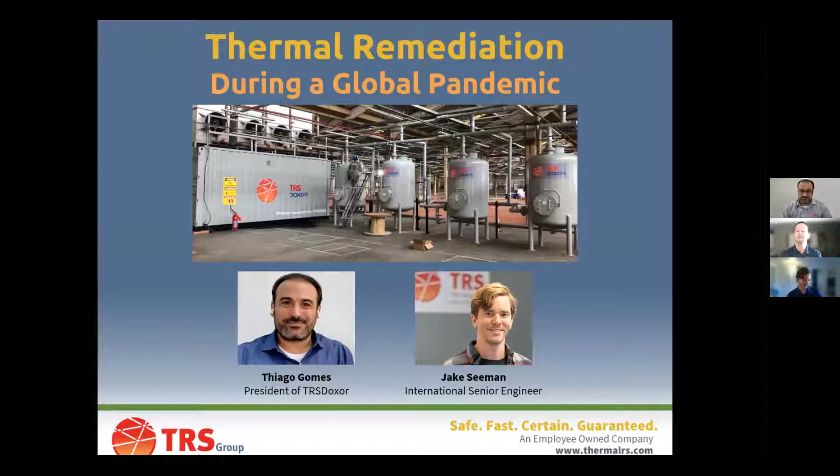This is a very special webinar because we're going to be talking about something that's not highly technical, you know, how do you cook TCE out of clay or anything like that. We're going to talk about the challenges that we've had during the COVID pandemic. As a group, TRS has over the last couple of years operated close to 20 thermal sites, and many of them in Brazil. So today we'll be talking about the ones in Brazil, and you'll be meeting Thiago and Jake.

One of the things that is a challenge is when you're doing a thermal project, you're heating up the ground, you're making the chemicals volatile, and when you do so, you have to extract them and you have to treat them. So you can imagine that we had projects in different stages of implementation. We had projects where we were drilling holes to put in electrodes or heaters. We had projects that we were constructing where we had as many as 10 or 15 people pulling these cables and laying them out between the power control units and the individual heaters or electrodes.

We had other sites where we were building or assembling the equipment. And then there were sites in operation. And all of a sudden you have this COVID challenge saying you cannot travel or you cannot be more than a couple of people at the site at any one time. So how do you deal with that when you have clients that still have tight schedules that want to be finished at a certain time? The other thing that happens is the price of everything increased. The copper cables got more expensive, iron pipe got more expensive, but clients don't want a price change. So that's the topic of today.

We will start by hearing from Thiago. My first question for you, Thiago, is if you don't mind giving us a little introduction about yourself and why you're interested in thermal remediation.

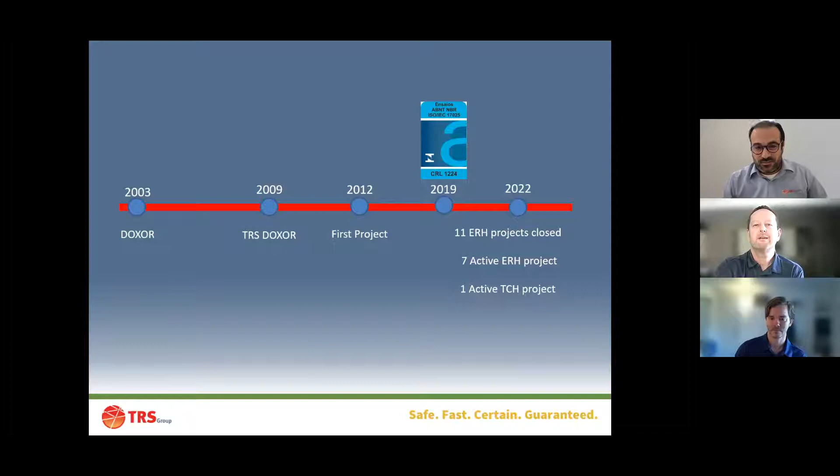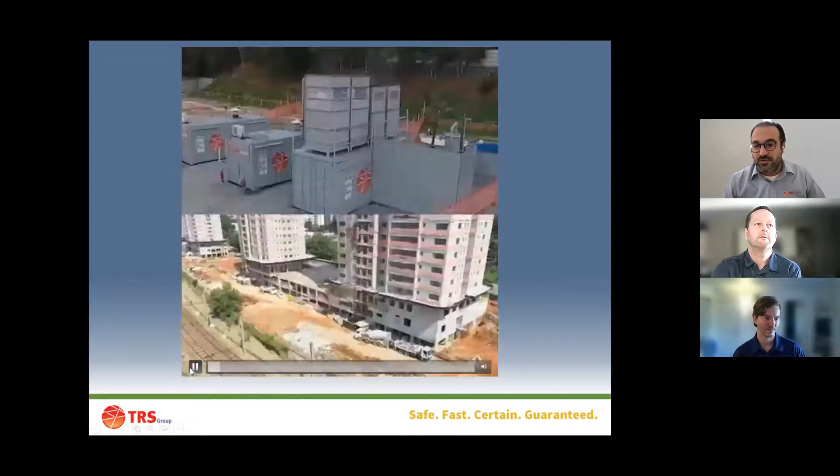Can you show us just one site and explain the driver behind cleanup? Sure, I can. One of the main drivers in Brazil was really the real estate, so redevelopment. There's a huge pressure for these areas in São Paulo.

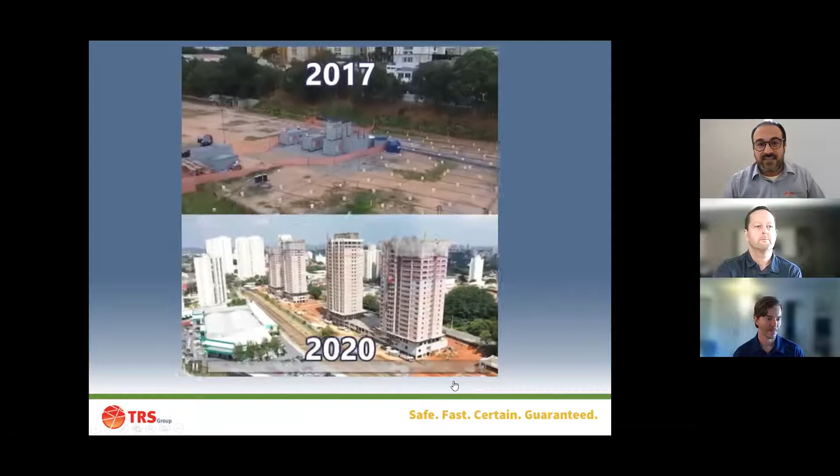You can see this was a really big site. We installed 468 electrodes, if I'm not wrong. We had to divide the site in sections because we needed so much energy to treat that site - we wouldn't have all this energy available in that neighborhood. So that's probably been the main driver. It was the main driver.

Nowadays I can see a little bit of change in the mentality, especially in the industry. They've learned in the past that you better spend more money up front and really solve the problem, treating your contamination sources using thermal instead of trying other technology - especially in Brazil, where we have such tight clay in most of the place, so it's really hard to use other technologies. That's one of the reasons why thermal has been really successful in Brazil, and there's been more and more sites going on.

So you definitely need to clean the sites because, a couple of years after you're done, houses will be built and there will be vapor intrusion if you don't do it right.

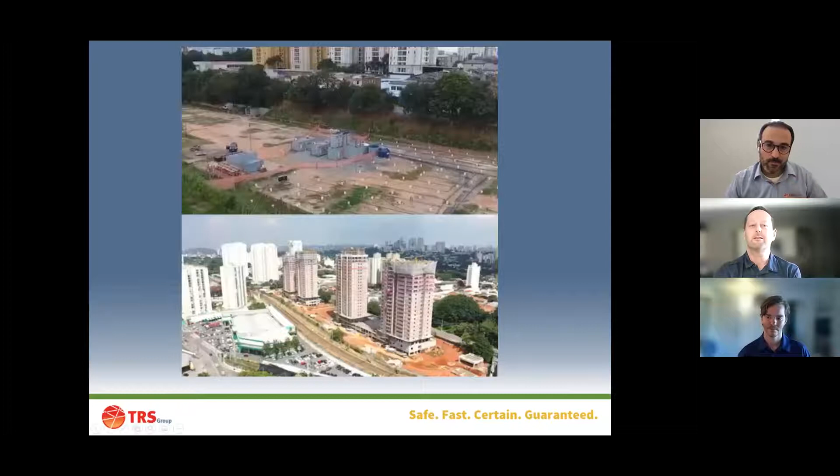Exactly. Jake, I know your role involves helping with the tech transfer, right? Training the Brazilians how to do this. Would you mind showing us a few more details of what that entails, please?

Yeah, absolutely. So with thermal technology, it's important to get to temperature within 2 or 3 months. We want to heat the site up fast because that's the most efficient, so the infrastructure is really important. The first thing that we had to teach Docstore was to build really good electrodes, and that was our primary focus at the start of the tech transfer.

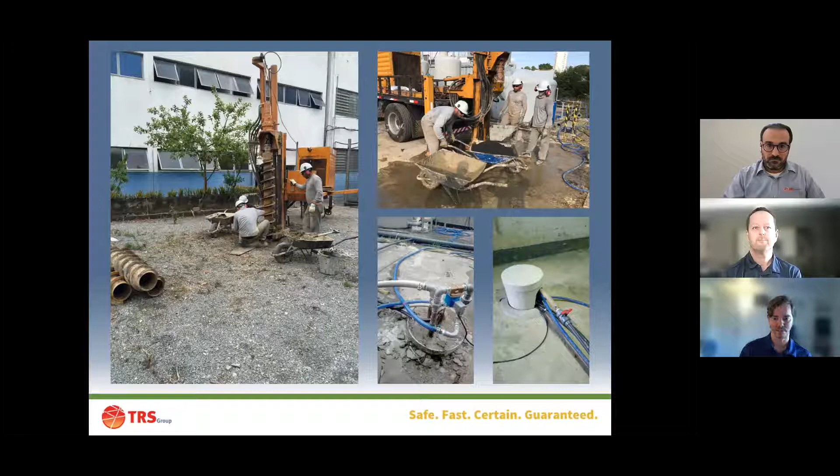Here's just some photos. When you think about it, we're working in Brazil, it's different than the US - there's different machines, there's different ways to do things. So we just have to make sure that we're still doing things at a high level, even though it's a little different.

The next thing we did with Doxor, which was really impressive, is that we had to build a power control unit - we call that our PCU. TRS basically sent over our specifications of the unit that we think would work best in Brazil, and Doxor built it from the specs. That's important because the PCU is distributing the power to all the electrodes.

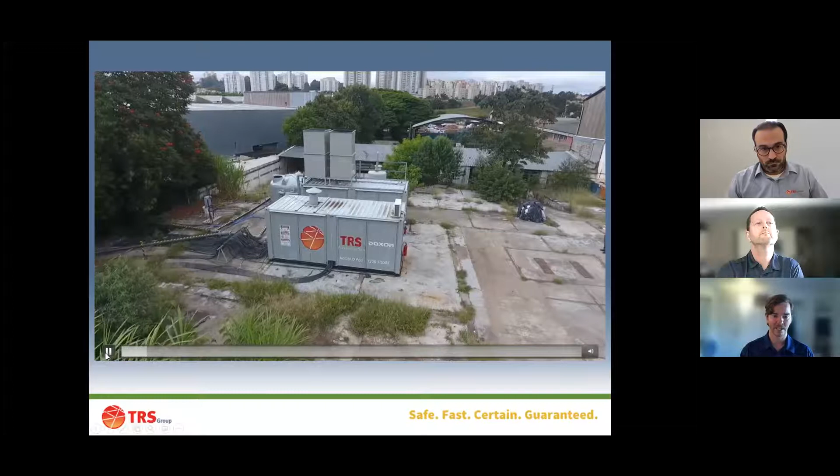The second container here, the one with the little towers on back - that's our condenser cooling tower skid, and that's going to assist with the vapor liquid treatment side of the system. Same principles apply: we sent the specifications to Doxor, and they built it.

This project here is really cool. Davi took his drone out, and we did this right in the middle - most of our projects are right in the middle of São Paulo. It's a really big city. It impressed me a lot the first time I went; I was just amazed by the size of it.

And then the last thing that needs to be transferred is health and safety. One reason we partnered with Doxor is because they knew the importance of health and safety. But in ERH and thermal sites, health and safety has different details you have to be aware of.

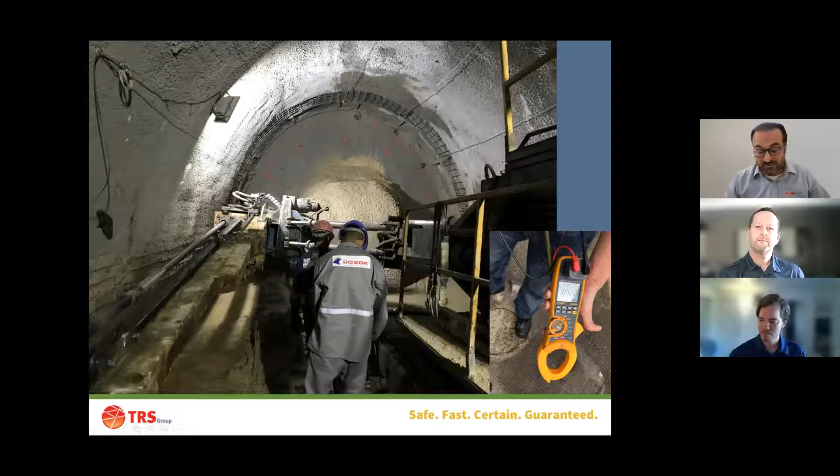How did you manage, because you had multiple sites in different phases? It was quite hard, as you mentioned, with many different sites in different phases. The good part was that the environmental agency in Brazil considered remediation on sites with a possible vapor intrusion problem or any risk to human health as essential service.

So we were able to work while other companies in other areas couldn't. On a site like that, we had trenches open, we couldn't just leave the site and let those trenches open, so we were able to finish. There were sites where we worked on industrial facilities with other companies on the same site, so we had to synchronize because we couldn't all be there at the same time.

We had to rent cars for every single employee because they couldn't share the same cars to go to the site. It was quite tricky, and on some sites we couldn't have more than 2 people from our side, so we had to extend the work a bit. It was pretty tricky, but we were able to finish all the sites on time.

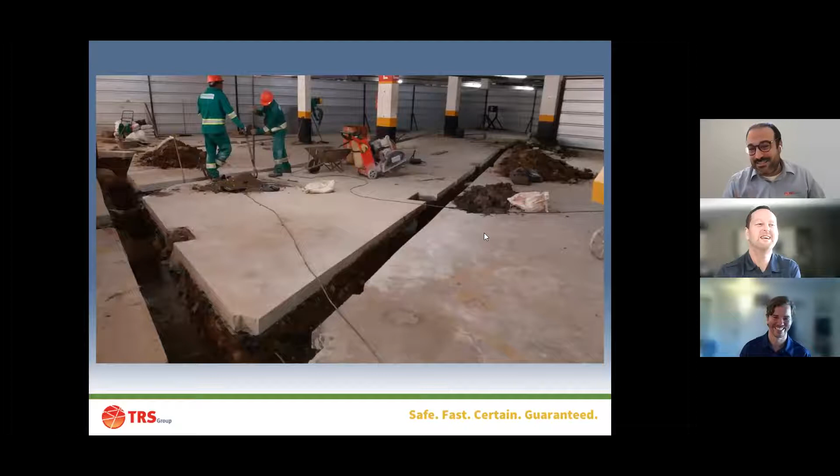This one you definitely couldn't just leave like this, right? No, we couldn't. That was a parking lot under a building. We couldn't leave it the way it was.

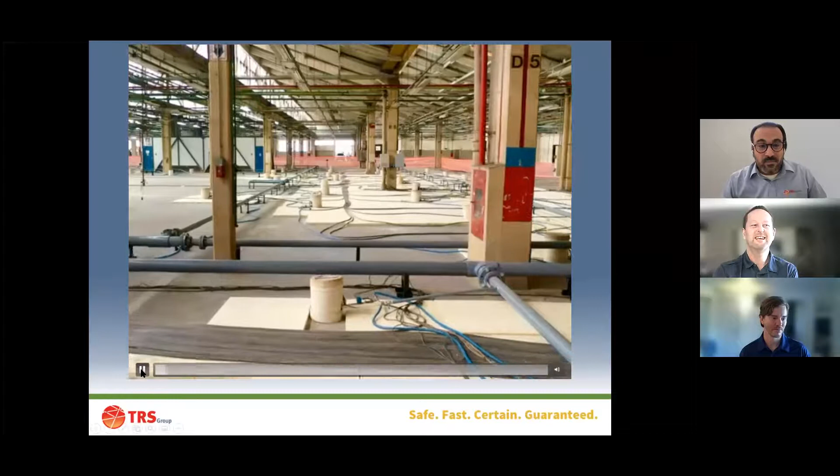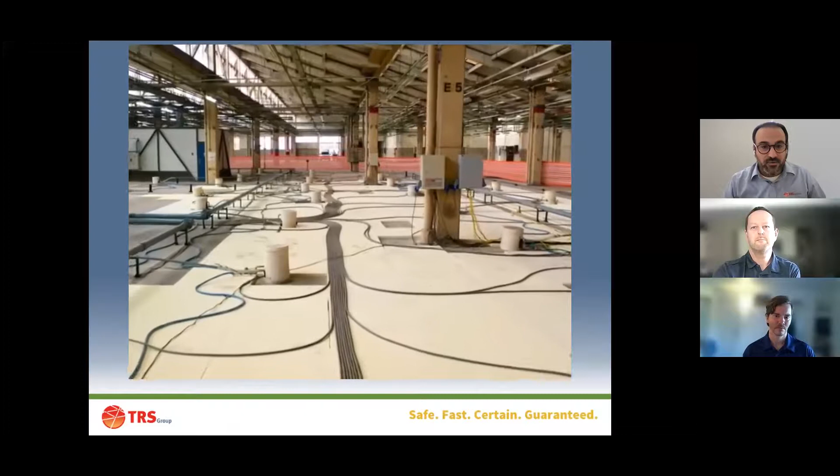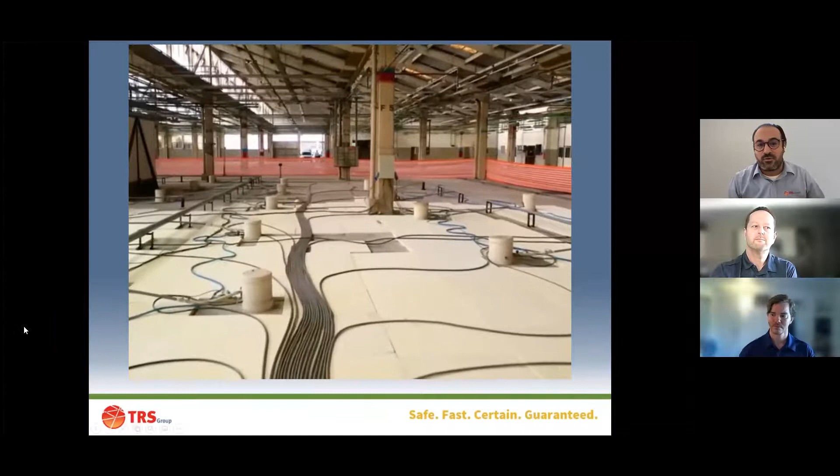Whereas this one is in better shape. Yeah, this is the one I mentioned, an industrial site with a multinational German company as our final client—we always work for consultancy companies, but the final client here is a German multinational. There were other companies working on that site, so we had to schedule with them since we couldn't be there at the same time. But we were really close to running the site, so we were able to finish and run it during the first months of COVID.

When you turn it on, how many people do you need at a site like this? Usually at least 4 people helping on the commissioning, and normally somebody from TRS would come down and help too. We couldn't have that on some sites since travel wasn't allowed, so we had 3 people doing the commissioning on-site, plus 2 online helping us check all the data so we could increase power and make sure everything was safe.

Jake, it must have been tougher for you, right? Because you used to just jump on a plane, go down there, help with the startup, take data, write it down. How did you keep track of things as they happened when you couldn't travel?

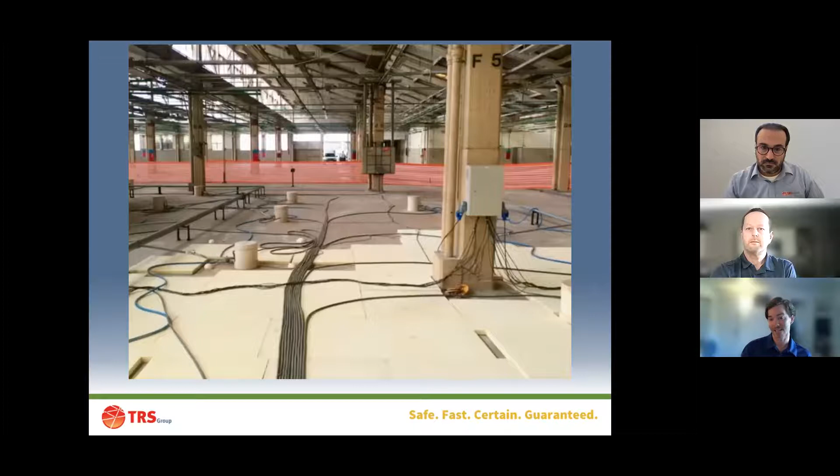Yeah, like Thiago mentioned, I generally go down for every startup, and in this situation I couldn't. Luckily, TRS and Doxor already had 8 projects under our belt completed or almost completed at the start of the pandemic, so we had a lot of systems in place for good communication. I knew the field staff very well, so these systems just became more vital. We have group chats for every single project, so I'm sitting on every project, viewing what's going on, asking questions, and seeing the photos.

And here is a screenshot of our condenser page from the control system. We have a remote control system that I log into pretty much every day. First thing to check is make sure the vapor liquid treatment system is running. Look at temperatures, look at data, just make sure everything looks okay.

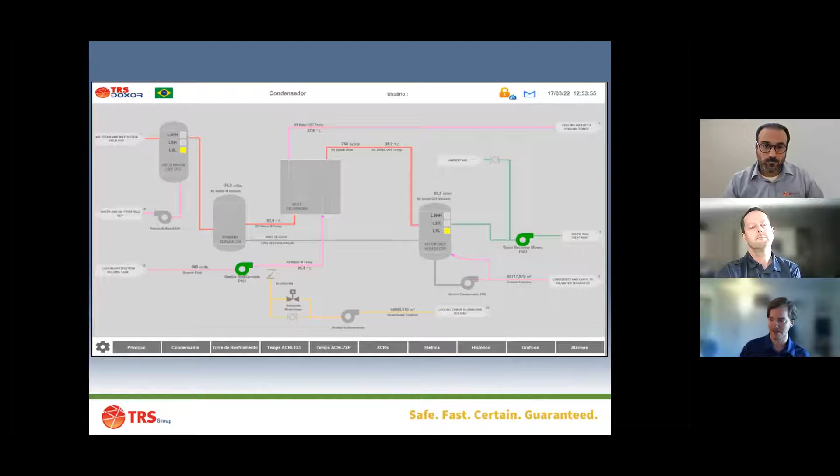After that, I scroll over to the power page, and we make sure that we're getting energy into the ground, and that it's going where we want it to go. That's really important. We don't want to waste energy by putting it in an area that may already be clean or just doesn't need that much energy. We also use temperature data to review energy input versus temperature and how that's going.

So all these systems were in place and I had been doing them. The big thing was more calls to Thiago, more calls to the guys on site, making sure standard operating procedure documents were available and translated into Portuguese for the guys. And then we just kept going along the way we had been going, but just a little bit more remotely.

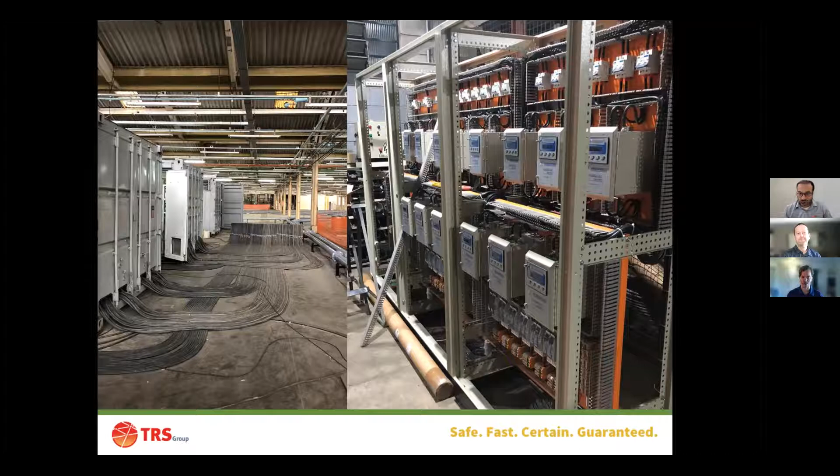Oh, 100%. No, I'm just kidding. We get to learn back and forth, and it's pretty great. Doxor, as Thiago just mentioned, was a huge part of our R&D efforts for TRS in the thermal conductive heating area.

This is a video of our first project for TRS Doxor for TCH, thermal conductive heating. They were part of the R&D, and we actually started building that PCU shown on the previous slide, and started our first project during the pandemic. So talking about translating documents, getting information over to them remotely, all of that during the pandemic - it was challenging, but it was a good challenge, and the result was great. Doxor did amazing work on the construction and installation. It was really beneficial being able to use some of their resources at their warehouse to install and operate our first pilot test, and then from there we got to see this site.

And it's actually a video. If you want to play it, it'll show, kind of span out the entire site. Yeah.

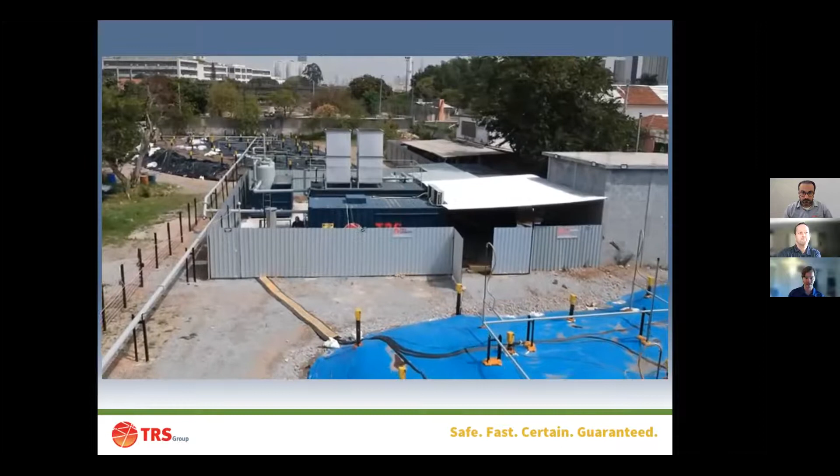Another part of that information transfer is, I'm part of the best practices team for TRS Group. And so when we're evaluating a new material that we can use, maybe a more effective option, maybe a more cost-effective option, safer or something like that, I'm always bringing my experience from TRS Doxor into the discussion with the other engineers. I'm saying, well, this is how we did it in Brazil. Can we do something similar? Is that possible? And vice versa.

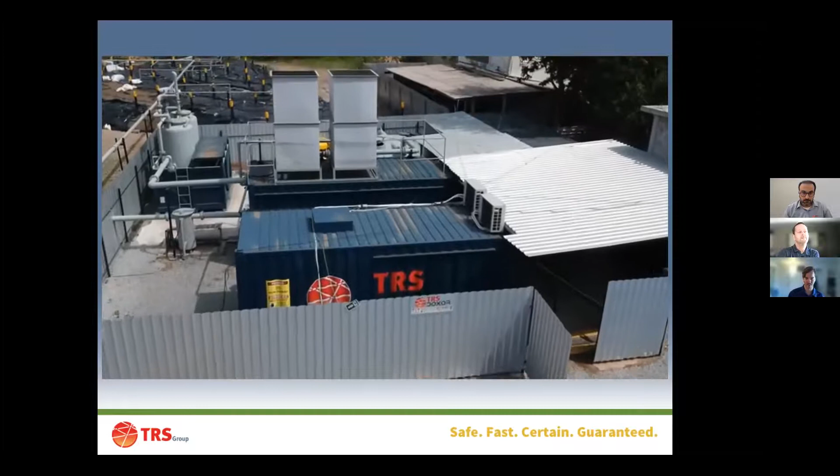When I see a new installation or a new project in Brazil that TRS Doxor needs to do, same thing, I go back to the best practices team and get that information from them. So it's very synchronized and it's very back and forth, which is a lot of fun.

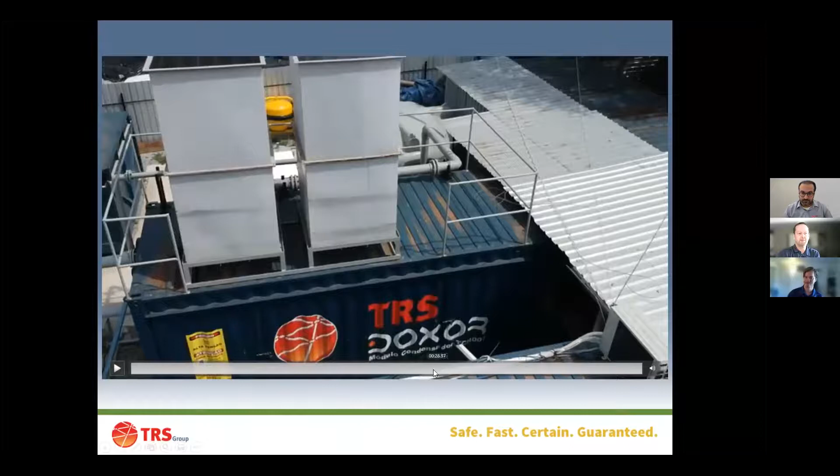Awesome. I have a silly question. How come one area is blue and the other one is black? Different stages of the construction. So like Thiago was saying, during the pandemic, materials were difficult to get. So we started this first area, we'll call it the blue area. We were able to start this area first because we got all the materials, they arrived and everything like that.

What you're seeing, the blue, that is a waterproof membrane, so that we don't get any rain or water infiltration on the TCH site, because with TCH, thermal conductive heating, we try to dry out the site in most cases. And in this case, we are trying to dry out the site. And so that waterproof membrane is very important.

You can see in the far area some brown as well as some black. Oh yeah, there we go. So the brown is mineral wool insulation, so that we get a nice warm coat around the site. I know you've used that analogy before, Gorm. And then the black is the initial liner that we were using to keep all that insulation nice and protected. And then we were going to install the blue waterproof membrane over the top of that. Cool.

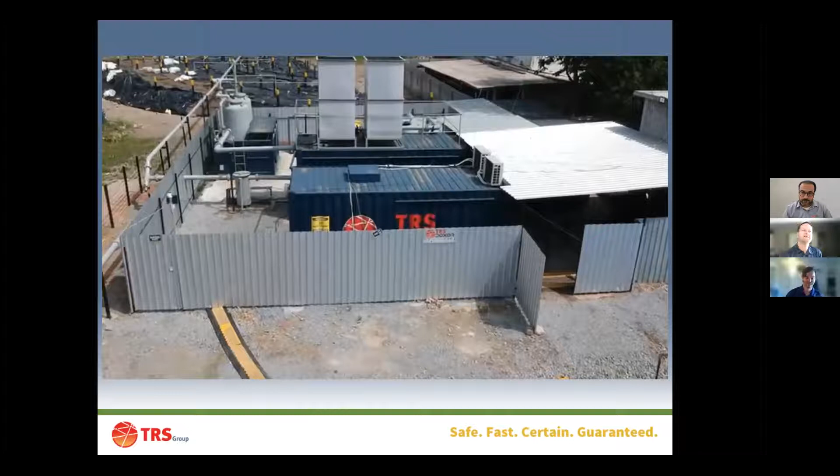So our heaters can get upwards of, Gorm, I think it's 900 Celsius. Mm-hmm. Yeah. So our heaters are running at 900 Celsius, give or take. And I think it's like 5 inches between our heater and a pipe that's in the ground, co-located with the heater. And that co-located pipe has a high temperature thermocouple, or RTD, a temperature measuring device. And so we're measuring that temperature.

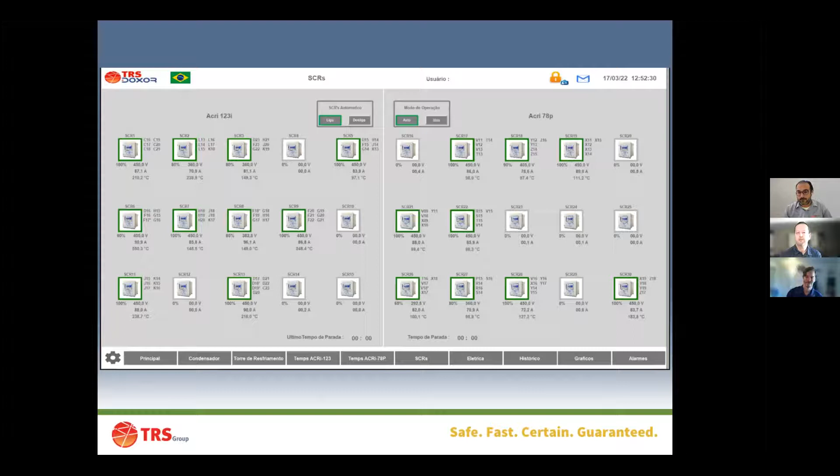There's a question from David asking, can you use this for PFAS treatment in soil? Yeah, we are using it for PFAS, and Gorm, I think you know a lot more about the site that we just completed. Yeah, we were doing some PFAS research. I think it'd be better if you spoke to that one. Okay, yeah, it's definitely the thermal conduction heating technology that you're seeing in this screenshot, a TCH thermal conduction heating site, right?

These are electrical heater elements inside a steel pipe, and you can put them closer together than this. And as long as you are above the water table, you can remove all the water by boiling it, and you can get to temperatures of more than 300 degrees Celsius. And for PFAS, we have found that we need to get above about 350 Celsius before we get really strong reductions. And we've done that in the laboratory.

We have done it in the field now in Alaska. We finished an ESTCP demonstration. That's a research funding program. We finished that right around Christmas time, and we have our soil samples back showing very, very good reduction in all the PFAS compounds we can measure in those soils.

So yes, we can do it above ground. What you're seeing here is actually a vapor cover, and there's a mound for insulation purposes. But sometimes we treat a pile of soil that looks just like this by sticking heaters into them and heating the soil until the PFAS has been extracted.

We can also do it in situ in the vadose zone, so above the water table. We can do the same. And the second project is going to be performed at Beale Air Force Base in California this summer. So that was definitely a yes to that. I see a few more questions coming in.

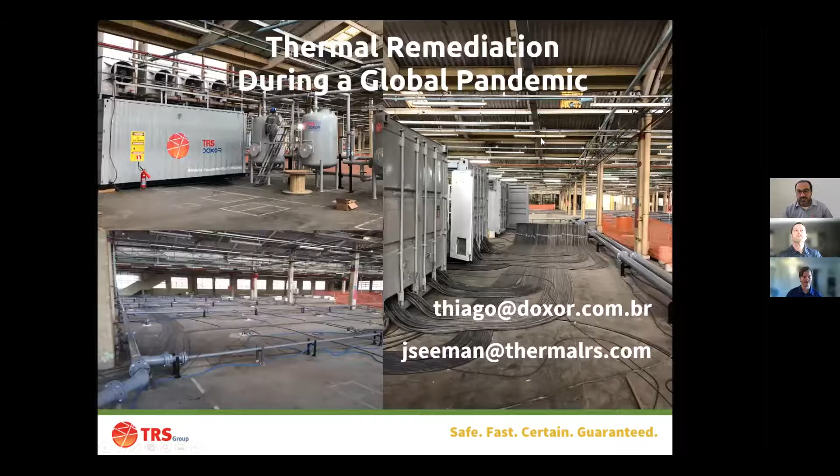Nick is asking, given the rising cost of commodities like copper, have you had theft, and has that been an issue at your Brazilian sites? And what do you do to make sure you don't get break-ins? What kind of security systems do you have? We never had a big problem in Brazil, even though we know there is real big value in all those cables laying over the site. There were sites where we had millions of reais in cables like this one. There's a lot of money in cables right there.

So at most of the sites we usually have a security guard 24/7, and we also have sensors so that if somebody gets in the site and tries to steal something, first thing is safety. It will shut down the system. There is no risk if somebody tries to grab a cable or something. So we turn off the system.

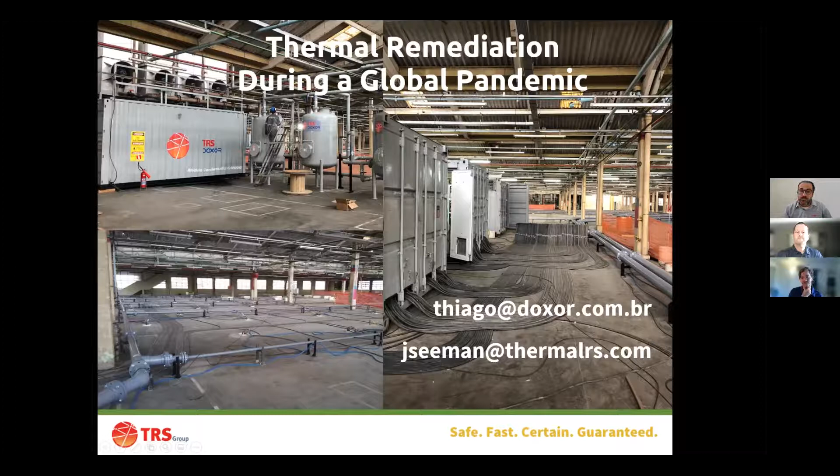And at the same time, we are recording, we have cameras, we have alarms on our phones. So there are ways that we can monitor the site, make sure that we don't have any big problems with thieves, and especially that somebody doesn't get hurt. Right. But we never had issues in Brazil. Luckily, since we started, we never had a big problem. That's fantastic.

There are a lot of signs around the site too, saying warning, electrical shock. Things like that. And for anyone that's never seen those in Brazil, they're much scarier. They say risk of death, and it's very intimidating. Yeah, very good. One more question here.

How do you determine the progress and the endpoint of treatment short of redrilling and sampling? That's a very good question. And I don't know, Jake, if you want to take it. Yeah, I can. And Gorm, jump in as you want. I've worked with you on this subject a lot.

So with progress and when to turn it off, that's a very common theme for thermal sites, because we're putting a lot of energy in the ground. It's labor intensive. It's a very money intensive operation until it's done, and you don't want to waste heat or energy. So we look at temperatures around the site. I like to make sure that I'm above what's called the azeotropic boiling point of certain contaminants. And we want to be heating above those boiling points for a certain amount of time. So that's one aspect that I look at.